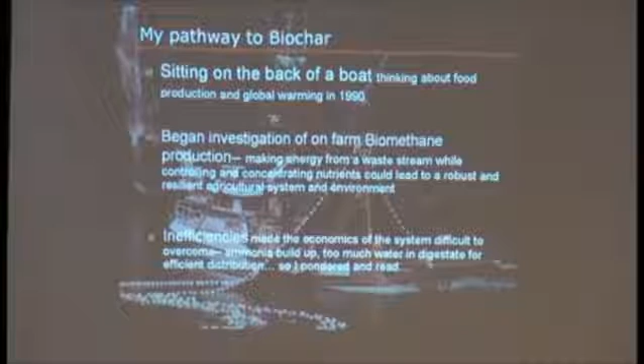My own personal background in this is I grew up around agricultural systems. My father and his family, as a boy, came over from the Netherlands, Dutch dairy farmers. My grandfather was indentured to my uncle. He moved out to Marysville, Washington, and became a dairy hand and a millwright at the Weyerhaeuser Mill in Everett.

So I was kind of around these systems. On the other side was commercial fishing.

I was around agricultural systems growing up, and I was up in Alaska about 23 years ago in Southeast. I starkly remember a set we made, and in it were 2 big sunfish and a school of mackerel. I had just read The Ends of the Earth by Isaac Asimov, and I quickly accepted the fact that we were affecting the climate.

In The Ends of the Earth, Isaac Asimov talks about the polar regions, we're going to see those effects sooner. So I sat down and started thinking about food systems, primarily because I knew that for every molecule of anhydrous ammonia we made as our source of nitrogen for conventional agriculture, we made one molecule of CO2. I also knew our tillage practices were fluxing CO2 out of the soils and into the atmosphere.

I also watched agricultural systems change. The 50 head and 50 acre kind of model had now changed to 500 or 1,000 head on 50 acres. And the system was out of whack. So I started delving into this.

I started reading Buckminster Fuller, E.F. Schumacher, and the idea that we had gained this knowledge that we have. I didn't want to regret the knowledge base that we had, but it's based on fossilized energy that we're harvesting from the ground, and shouldn't we maybe use that knowledge to fix the system?

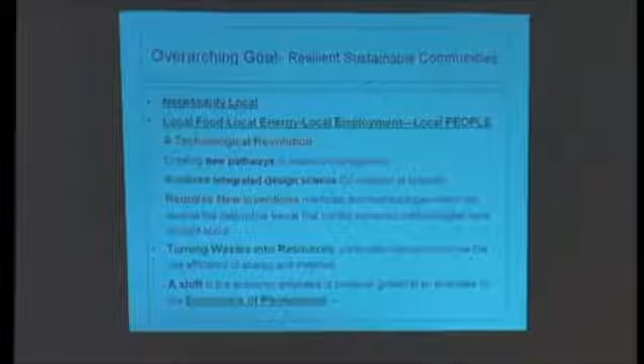And that it was necessarily going to be local. We had to get away from these huge power consumption systems, the food system that was based on massive transportation, that what we needed was design. We didn't need to really reinvent wheels, but what we needed was an integrated design.

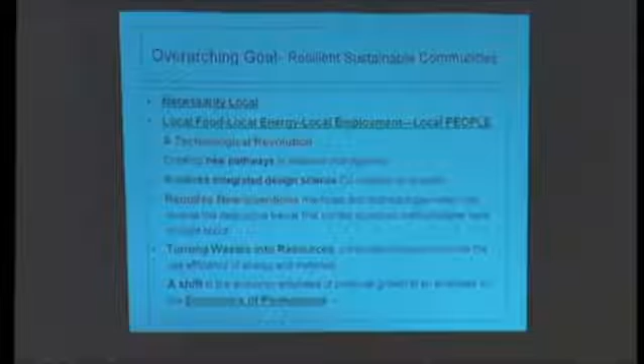These things weren't standalone systems any longer, and they shouldn't be. Maybe the cooling tower, that heat could be used for something else. So this was going to require innovation, but it wasn't necessarily going to require invention, it was going to require high design, was the thought.

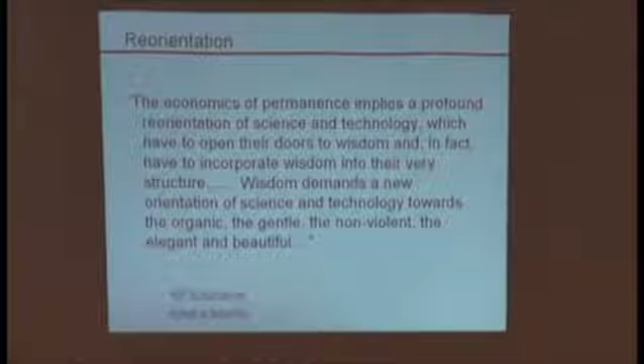The other thing is a new economic model. I really enjoy E.F. Schumacher and the idea that the CEO needing to make 320 times what the janitor makes is a lot of the reason we're in the situation we're in. It can be driven by capitalism, but it doesn't need to be driven by laissez-faire capitalism. It doesn't need to be that type of a system.

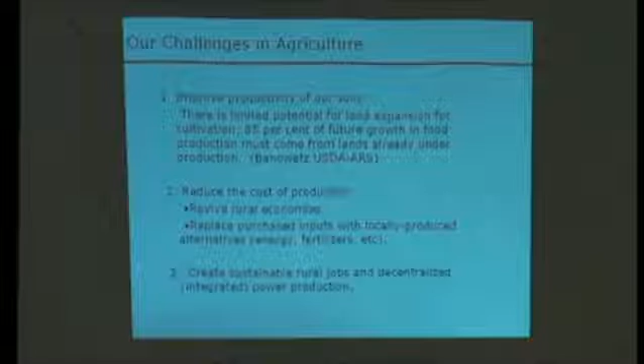Looking back at agricultural systems, we have a finite amount of soil that's going to be tillable and available for arable food production. We have to make this good nutrient-dense food, hopefully. The things we're eating right now are food-like products. The nutrient quality of our foods is just diminishing, and it's because of the way we treat the soils, we pump NPK in there, and we don't think about the whole entire system.

We really should try to revive our rural economies by localizing.

What is biochar? Biochar is essentially charcoal, but you've got control over it. You're manipulating the temperatures, and for me, I try to have a lot of control because I'm trying to research the material. But essentially it's charcoal, it's an open structure. It holds on to nutrients and it holds on to water.

And if we're looking at ag systems, if we look at cleaning up toxins, I have an ability to maybe grab onto heavy metals and grab onto hydrocarbons with it, because of this open structure.

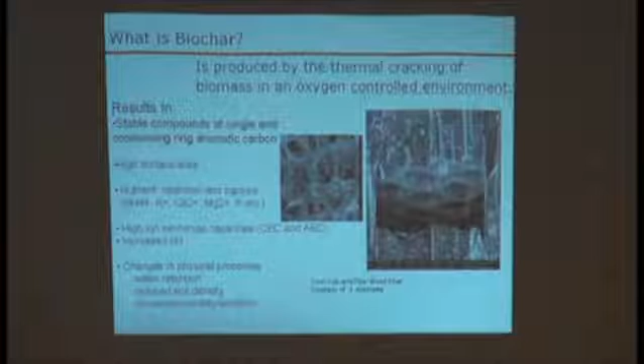I'll get into kind of what happens in this one. So if you can imagine biomass going into this system, it's oxygen controlled, it's substoichiometric, there's not enough oxygen for complete combustion.

So what happens in the process of biomass combustion, it breaks down in order of cellulose, hemicellulose, and then the lignin. The cellulose and hemicellulose tear out as gases out of the cell wall. The lignin and the inherent structure of the plant is left behind, and what you end up with is this beautiful matrix of internal galleries.

That allows for nutrient exchange, allows for water holding capacity. There's certain chemistries that get developed depending upon temperature regime and feedstock, and as a scientist I'm constantly manipulating things based on those factors. I increase surface areas, I do things like bulk soil amelioration of the soil. So on a clay soil, I can increase gas exchange and decrease the amount of water that's in it.

But on a sandy soil, I can increase the amount of water being held and maybe increase some of the nutrient cycling. For a clay, you get the platelets laying up, the char gets in there, and those platelets stack around it. So now the inherent nutrient value of a clay is quite high. The problem is it's not available because of the structure of the soil.

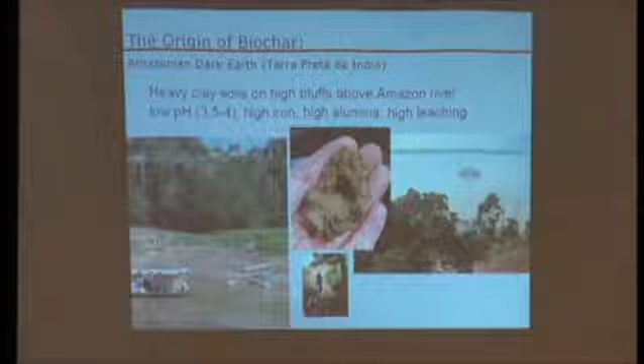This kind of science actually comes from soil science. It started about in 1962. There was a soil scientist named William Sombroek who came from the Netherlands. He heard about this very fertile soil in the Amazon. The name of the soil they were hearing about was called Terra Preta de Indio. It means the black earth of the Indians.

What we know about soils is that the jungle soils of the Amazon should be very infertile. These are oxisol clays. So Sombroek went down there, and what he found was, in fact, this black soil.

Around that black soil, in this oval shape, around the outside was a terra mulata, which is a little more fertile than the parent soil. The parent soil is an iron-rich, acidic clay, very poor for growing agricultural purposes. The terra mulata is less acidic, more nutrients, and then you get to the terra preta. It's perhaps the most fertile soil in the world.

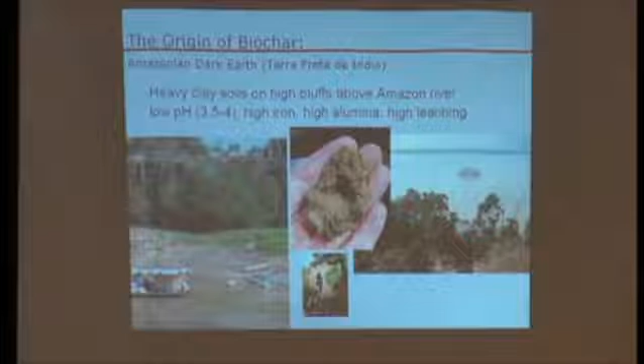As he dug down through and made his pits, what he found in there was that it was clearly anthropogenic. It had shards of clay in it. There were bones in there. There was refuse from human activity.

And so as he looked out and started looking in the greater area, what he saw was causeways that linked these things together. This was a very large civilization, maybe in the order of millions of people living in the jungles.

So whether by happenstance or by design, what the people found - this was Stone Age, 10, 12,000 years ago - is they cleared out their area where they could live. It wasn't a slash and burn agriculture, it was more of a slash and char type of agriculture. They'd go out into the surrounding jungle, bring the biomass into their villages, burn their wastes in that, and what they found was a very fertile soil.

Whether they did that on purpose or just found it later, it doesn't really matter. It's a fact. So this is the result. These pictures were taken by a friend of mine named Christoph Steiner, who had gone down there, and this was the same area right next to each other, the parent soil and the terra preta soil. They still go out there and harvest that and bring it into the local towns, for raised beds and that kind of stuff.

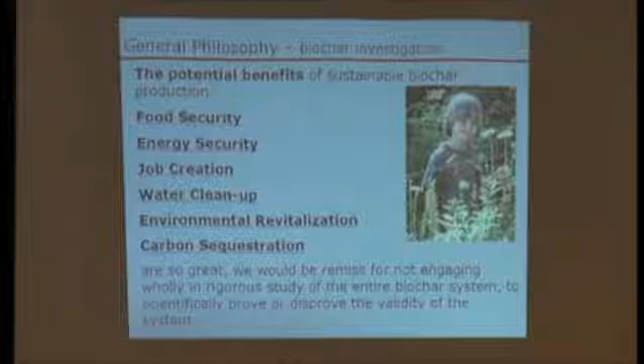So what is this, and what's the potential? It actually has potential for all of these things: food security, energy security. This is base load energy - it's biomass energy. I can use it when the sun's not shining, when the wind's not blowing. I can create jobs maybe through this process. I can certainly clean up water - I've been doing a lot of that. I can clean up toxic soils - I've been doing that. And I'll explain how this is actually a method for extracting carbon from the atmospheric cycle through photosynthesis.

Now, there is a tendency around biochar, what I call drinking the Kool-Aid. There's people that see it and think, oh my God, I'm going to save the world with this. It's part of a wedge. But it does have all these possibilities, so clearly we should investigate it.

That's why when I was studying methane gas production, I came across this and thought it might be a way to make that more efficient. I locked in on it because if I understand that carbon and make it the central core of a design, all these other things can play off of it. It's part of an entire system.

Major production techniques: you have slow pyrolysis, maybe a more traditional method, like the old Missouri kiln. There are modern methods that are a lot cleaner. I personally use slow pyrolysis and gasification. Fast pyrolysis is a modern method where you use very fine material and heat it rapidly, making quite a bit of bio oil and a little bit of char.

Gasification has been done for a couple hundred years. In that method, you take the biomass, use some oxygen, and you can actually make a gas that you can burn in an internal combustion motor. I also do gasification.

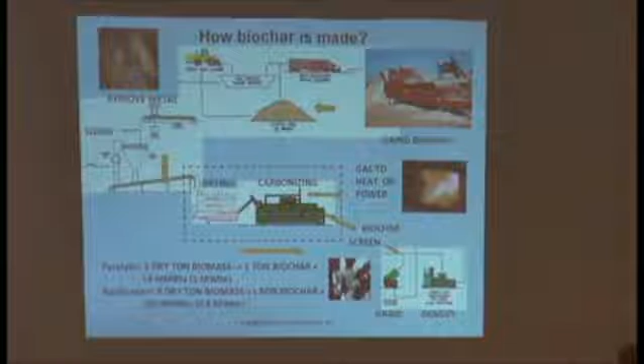So how is it made? Basically you have the biomass waste that comes in. It can go through sizing and screening, then drying, carbonization. There are fugitive losses in the real world, but if you look at the mass balance on the pyrolytic side: 3 tons going into the system, you end up with 1 megawatt of thermal drive extra, a ton of carbon, and the inherent energy that drives the system.

It's an exothermic reaction. On the gasification side, if you have 8 tons going into the gasifier, you end up with 1 ton of char and 6.3 megawatts of thermal drive.

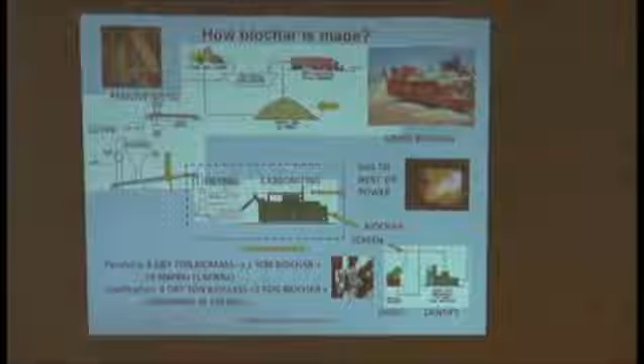It's being made right now. It comes from gasifiers. We've been doing gasification, and it's happening right now on industrial scales in various areas.

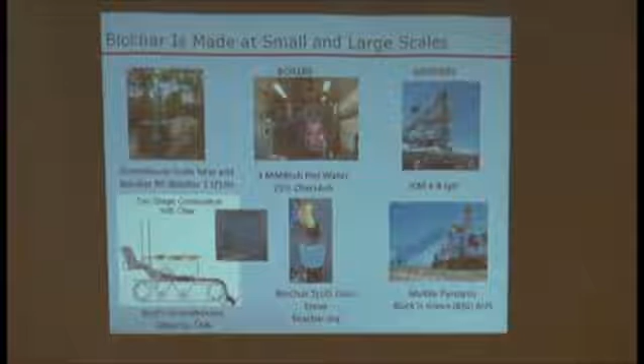We can use all kinds of different scales of size. So you have the industrial size, you have more of a mobile unit, and then you have these TLUD cookstoves, which are fantastic devices for the developing countries and the developing world.

Right now in the developing world, 500 million 3-stone open fires every day, feeding 3 billion people every day. Those 3-stone fires result in emphysema in women and children, millions of them. The number one killer in the developing country, among women and children, is emphysema from the 3-stone fire.

Also, the fuel for 3-stone fires generally comes from primary forests. And the other thing that happens is women and children have to go out and harvest that fuel, and terrible things happen to them in that process.

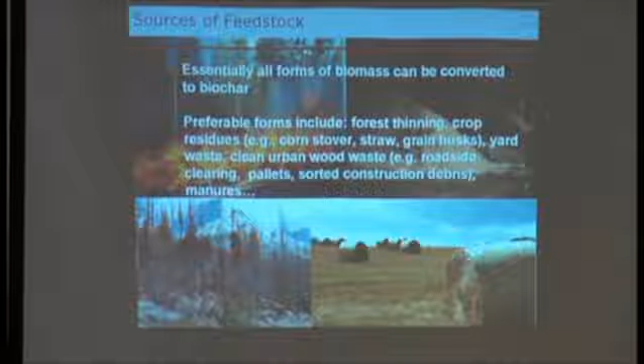Where does this feedstock come from? The feedstock is waste material, and it needs to be waste material. We can't harvest primary forests for this. It doesn't make any sense on many levels, economic or environmental.

It does have potential for being manipulated and destroyed by big money, because you do have potential for biofuels. So personally, we want this to be sustainable. The first thing I started doing is putting together sustainability practices for the entire biochar world, because we want to be self-policing, and we do not want to do what the rest of the world is doing around biofuels. We want to be very cognizant of what we do.

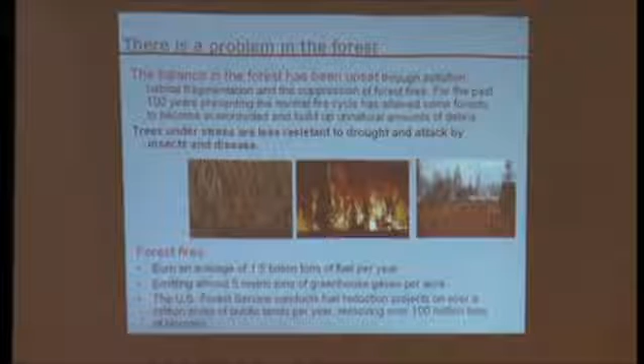I come from the forestry sector, that's where I work. We have huge problems in the Oregon forests. I know we have the same problems around here, maybe a little less, but I don't think so. Our fuel load has gone through the roof.

We've been putting out fires, and the reality is, when you look at the big picture—I'll get a little esoteric—the Aristotelian idea of the 4 elements, earth, water, air, and fire, is imperative. That's a reality that exists all around us. We eliminated fire, and fire is the unifier of all 3 of those things; it affects all 3. We eliminated that from the environment by trying to put it out, and now we have these crown fires that burn the entire forest, instead of the low, cool-burning fires that traditionally took care of the forest's diseases and these types of things.

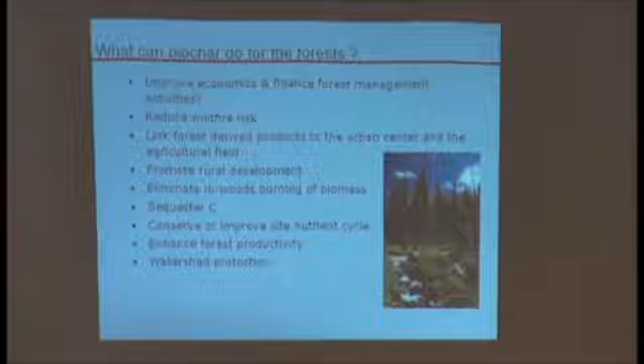So what it can do for the forest is maybe we can do this in the woods. As much as I enjoy a good bonfire, I see it as a tremendous waste. When I go out there and light them off in the forest, yeah, it's cool, but I'd much rather turn this into something useful.

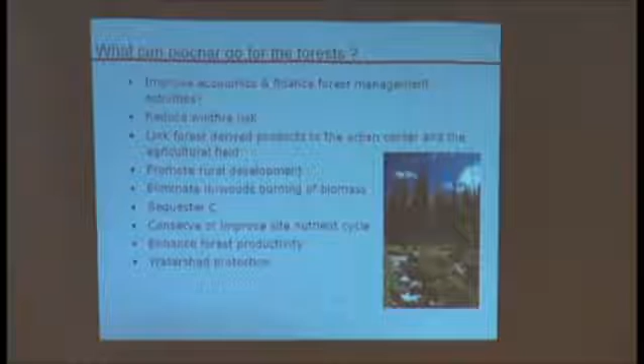So how is this a carbon reductive methodology? We all know fossil fuels are going to put carbon in the atmosphere. These were taken off the cycle millions of years ago. It's no longer on the balance sheet of the Earth, and then we shove it up there and it's throwing it off.

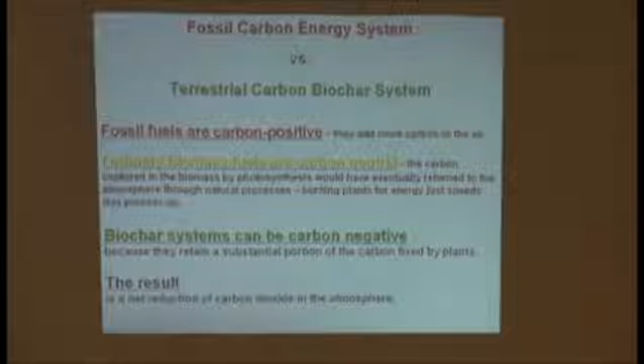Normal biomass, if we burn it all the way to ash, is a net zero sum gain. Now biochar, when I put it into the system, if I'm harvesting my material properly, getting it from a waste material, it's going to be fluxing back into the atmosphere. It has a life cycle of around a decade in the Northwest. I take it through this process, harvest this energy, and yield carbon, and that carbon has a half-life in the order of 500 to 1,000 years.

And that carbon, then I use it for something. I find value in that for society—either nutrient exchange or cleaning up toxins is what I've been doing, and water holding capacity.

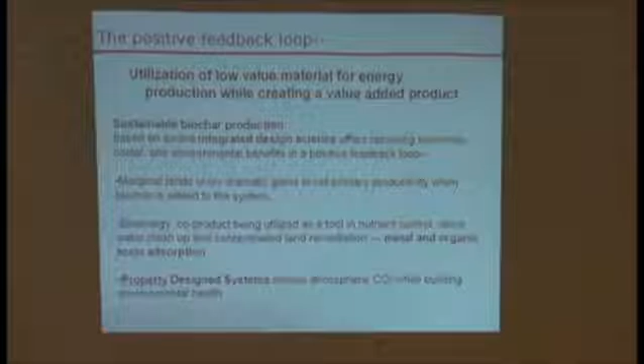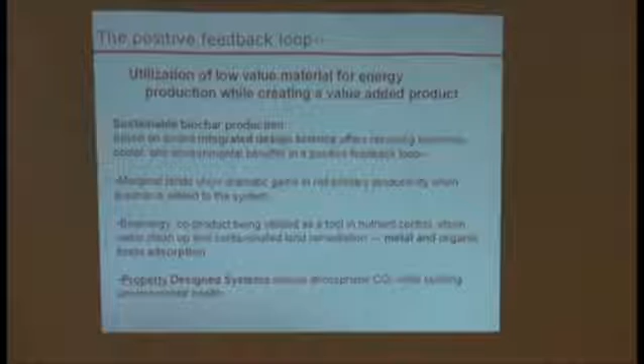Now, if I take this material and apply it in an area—let's look at the developing world—these are generally very poor soils. If I take this carbon and add it to a very poor soil, I can show many papers that show net primary productivity increasing 150, 200%. I'm not going to see that increase in a mollisol of the Midwest, but I'm certainly going to see it in a developing country with very poor soils, like Haiti or the Congo.

So now what I can do is maybe these folks can gather these little stoves, cook their food on grasses, take that char and put it into their poor soil, and increase that net primary productivity around their village a little bit. Do that again, continue that cycle, and all of a sudden they have a fertile soil. Now they don't have to do slash and burn agriculture anymore, and they don't necessarily have to go out far distances to collect their fuels.

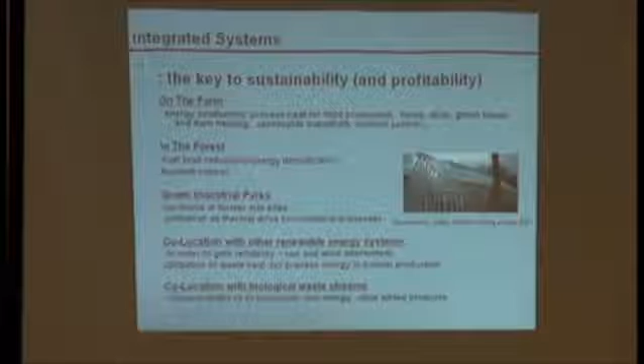For us, I can't stress enough how this is part of a whole system. This is integration—this is what we need to do. This is what I'm driving toward: building these systems so that we integrate them together, so that things like methane gas production from bio-waste, from food waste, and from dairy operations are linked together with composting operations, which are linked together with biochar production. Because all these things can play off each other and the co-products can benefit one another.

The co-product of the carbon that's produced—I take the nutrient-rich liquor that comes off the biogas plant and mix that carbon with it. I grab the nutrients out, I clean the water. I take the fiber-rich fraction that also comes off that plant, and I co-compost.

Now I hold on to these organic acids that develop in there, which have food value for microbes. Those impregnate that internal matrix of that carbon, and then the microbes start to go in there as a food source—they find a food source and can grow into it. The other thing that starts to show up is more and more hyphae, mycorrhizal fungi. You start to build the food web of the soil again, and you start to get nutrient-dense food again.

So as a researcher, I needed to be very specific. This needs to be a commodity if we're going to do enough work. We need to take gigatons of this stuff out of the atmosphere. We're at 400 parts per million right now. We need to take it down to 350. So this has to be driven.

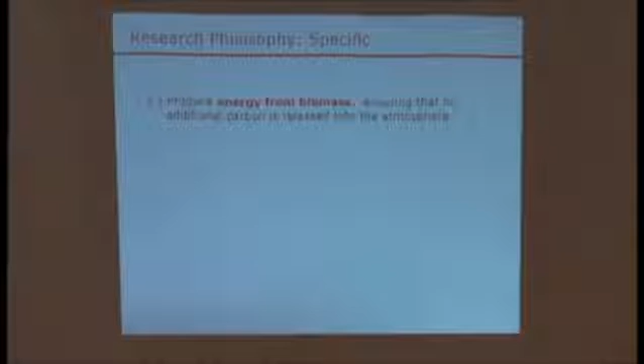Yes, we want the villagers to do it too, but us in the developed countries, we need to do this on a pretty massive scale. So it's got to be part of an economic model where this is a co-product from energy production. We have to do a very high, rigorous design so that it's done and it removes CO2 in the process because of my location.

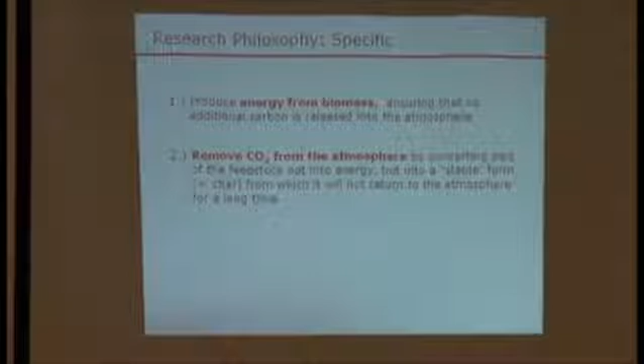I located at a timber yard because I knew all that biomass was coming in there. It's already there, I just move it over and carbonize it. So now I make it in a stabilized form. And at the same time, it's a very dynamic material. The pHs can be adjusted, the chemistries within it can be adjusted. I want to do this in an artful manner, put it in its right place so I can get its best use. So I can make...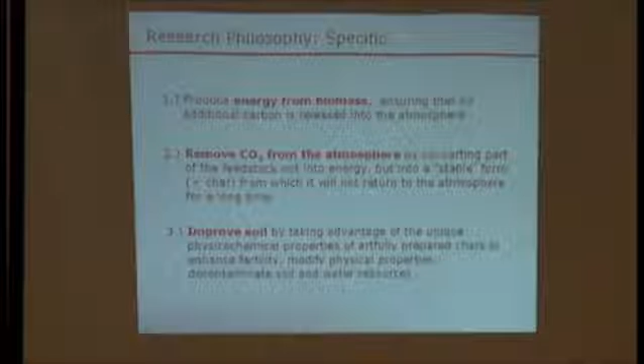a very alkaline material for a very acid soil, like you guys probably have around here because of all your rainfall. So it can be a liming agent. If I want to put it into a compost regime where I want the pH to maintain at about 6, I can do a lower temperature char. I can hold the pH at about 6, and I can hold onto the ammonia as ammonia. I don't lose it as NOx into the atmosphere.

NOx is, I think, 320 times worse than CO2 on a life cycle analysis basis. And now I have a compost that I haven't lost the nitrogen out of, and it's still plant available.

So this is just a description of how dynamic the material is. We made chars across temperature regimes of wood and grass, and... yeah, I don't need to look at that. So anyways...

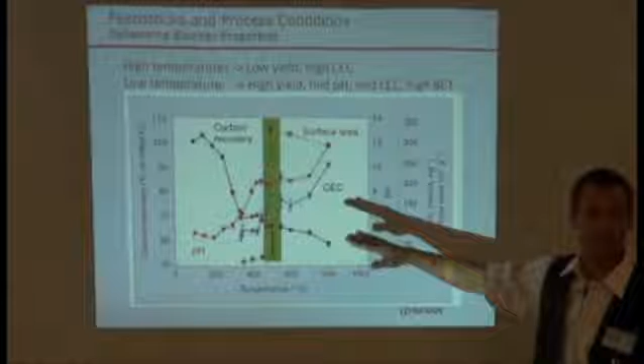This is a description done by Johannes Lehmann from Cornell, describing what happens across a temperature regime. We hit in this area, and all of a sudden a bunch of things start happening. We do see the carbon recovery gets lost, but that carbon would get lost anyways from rotting or whatever. However, we hold onto about 20 to 30% of it in a form that's stable.

Let's see, what surface area goes up, because of all that. See, surface area goes up. Cation exchange goes up, not always, but it can. And...

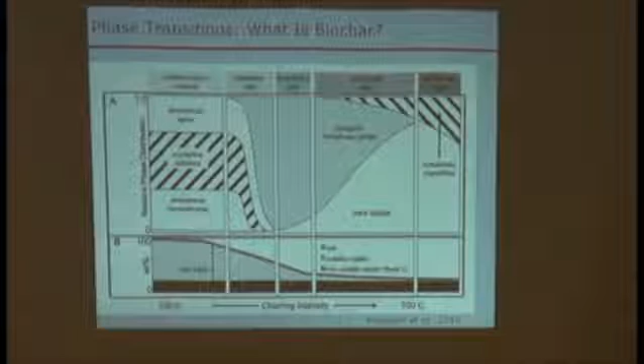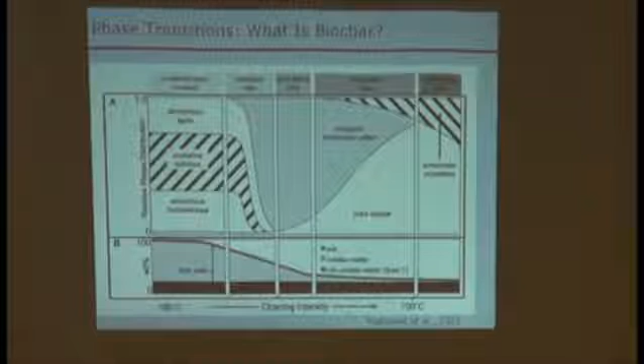the pH goes up. So what this model, done by Markus Keiluweit down at Oregon State University, describes is what portion of it becomes a stabilized form, this turbostratic crystalline carbon. This is the potential that you can hold onto the carbon. Basically it's a description that we can hold onto about 25 to 30% of it in this form that has long half-lives. Why is that?

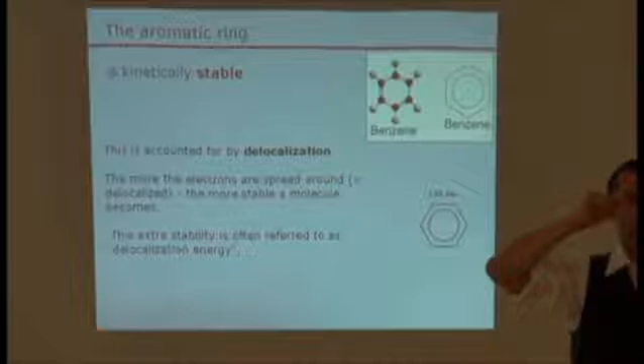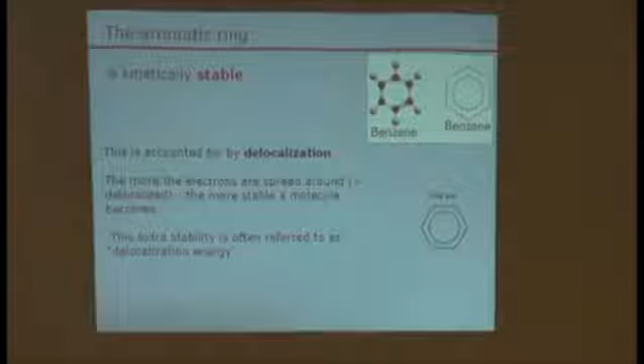When you look at biomass that's gone through quite a bit of temperature, at the end of it what you end up with is this carbon ring. As that hydrogen finally gets driven off, you have 4 valence shells that the carbons need to fill, so they just swing around and grab another carbon. So now what happens is at that temperature regime, you build a lattice work of double carbon - not quite a double carbon bond, but close enough. It builds in height and width, and you end up with this very stable material that doesn't behoove the wee beasties to crack and try to get the energy out of, because it costs them more. That's why we end up with this long-term ability of it to stay in the soil.

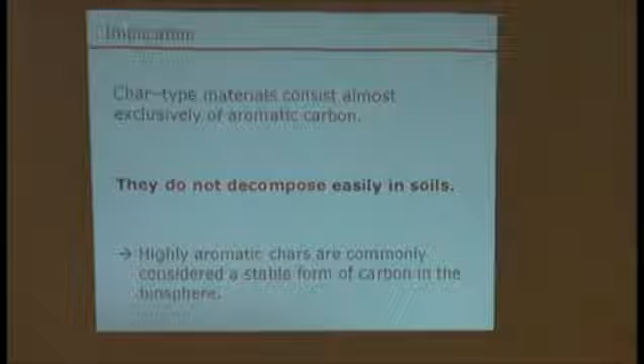So it doesn't decompose easily, but the edge structures do break down. And the other thing is, if we have minerals involved in this, minerals get in the way and they become exchange sites. So while it doesn't break down, it does slowly oxidize.

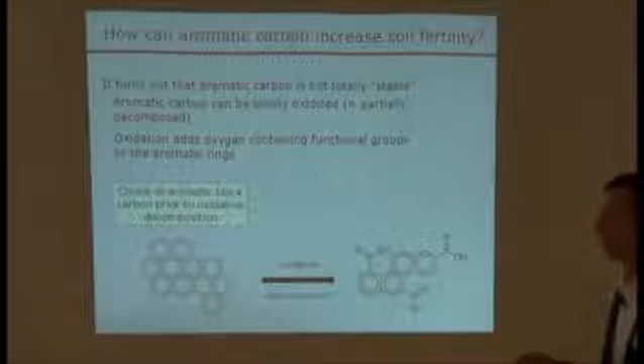After it's sitting in the soil, or if I manipulate it with steam, or if I use ozone or something like that when I'm screwing around with it, I can get these oxygen functional groups to show up. Now I can start to do things like grab up heavy metals, exchange nutrients, and hold onto them so they're not lost by getting washed out. And the plants can harvest them using the hyphae of the root. I hold onto all of these minerals. This is just a description that I'm also holding onto organic toxins and inorganic toxins in this process.

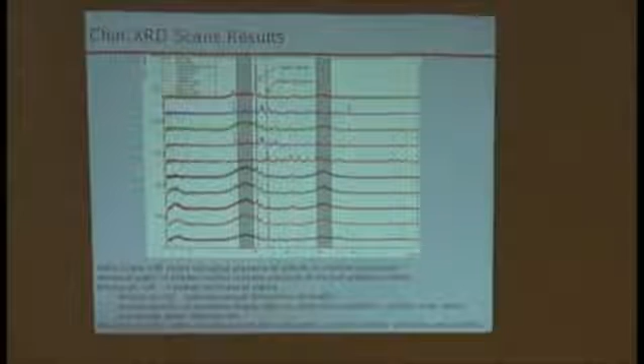So what this is, I was outperforming activated carbon sometimes for cleaning up toxins, and I couldn't quite figure out what was going on. So I had a professor buddy of mine do some XRD scans, and what we ended up seeing was carbonates, silicates and sulfur functional groups. That was why I was outperforming activated carbon - because I had these minerals involved in there.

The zinc comes along, I bind it up with a carbonate or a silicate. It's a dynamic material - some of those things are amphoteric, so they'll switch charges depending upon the pH of the solution. The silicate is always going to be negative, however, so I can do both cation exchange and anion exchange on the same material. It's very, very unique in the environment.

So this is just a description of some of the things we saw. Some of the acid groups that are left in there also bind up toxins, right? These acid groups show up through the temperature. I don't know, I'm kind of going off a little bit.

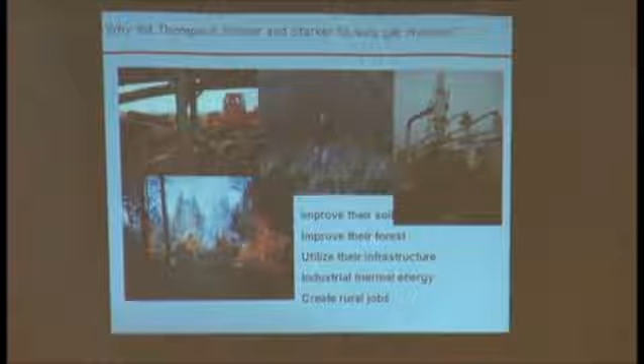Let's see, so why would a timber company get interested, right? Well, I worked for Thompson Timber and Starker Forests for about 4 years as their director of biomass energy, and basically what that allowed me to do was just do my research. I didn't have to go chase grants.

And they're a unique family forest company - both of them have been down there 100 years one, 150 years the other. They have concern about their rural environment, which I imagine exists in this community too. We're concerned about what's going on in the forests, we're concerned about how we're affecting the waters, and we wanted to reutilize old infrastructure.

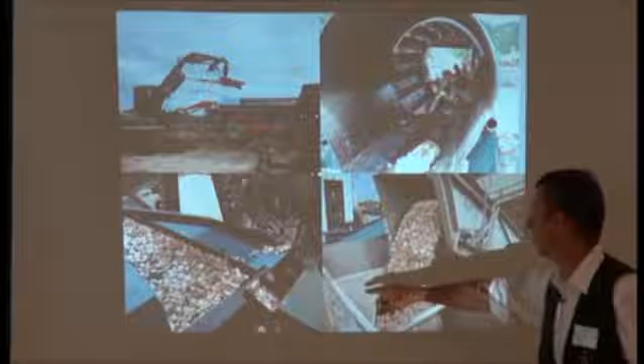This is kind of a typical timber yard. You can just see how much biomass is laying around there rotting. So this is a chipper plant that we have down there. These chips that come off the top screen, that's what I use for my gasifier.

I'll describe what my system is. That is my most refined fuel, right? It's just the overs off our chipper plant. That's kind of what they look like where my hand is. And then this is just more of that rotting material.

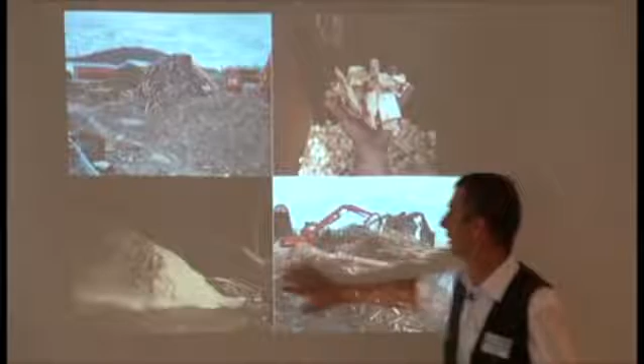This is what I use for gasification. This type of material here, it can have rocks, whatever, minerals - any size doesn't matter as far as density of it. That I can pyrolyze, which is a separate system, right?

So now I can take this more refined fuel and actually run an internal combustion motor with it. On the pyrolytic side, I can take the waste - like you imagine the chipper trucks coming around here cleaning up - that stuff can be pyrolyzed, and it's very good for cleaning up toxins because of the amount of minerals involved. There's not a lot of minerals here, but I can make good clean gas there.

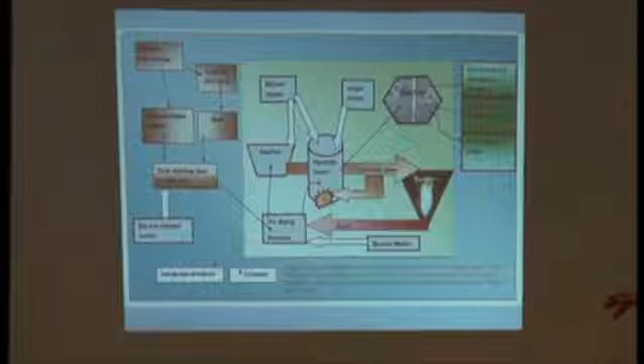So now I can make chars anywhere from about 300 degrees centigrade to about 700 degrees centigrade. I have thermocouples all over it so I can monitor it. Now I can make about 100 pounds an hour of this material - I can take that out and make enough so we can do research. That was the point. And I need to have provenance behind the material so that any results I saw, I could correlate back to something and make a statement of why this happened.

So we went and sourced a Pacific class gasifier. This was built about 25 years ago - this technology has been around a long time. This happens to be one of the best designs that was ever built. It's called Pacific class because it was built for the plateau of Papua New Guinea.

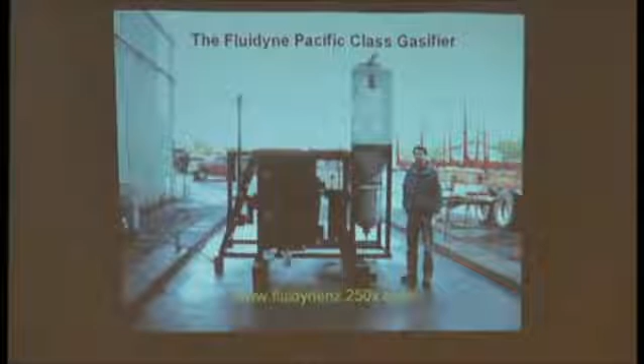Two of those gasifiers ended up at a doomsday cult over in Montana. Y2K failed to go off quite right, so they all sued each other. This ended up getting bought and taken down to a nursery down in Northern California. When I got involved in this process, I called up my buddy Tom Miles, an engineer over in Portland, Oregon, and said, Tom, I want to run this retort, but I want to use a gasifier to do it - where can I get a gasifier? He helped me get this down in Northern California.

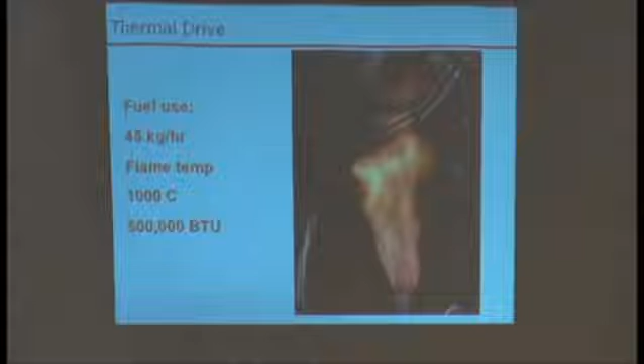The thermal drive from that is I consume 45 kilograms an hour, about 100 pounds an hour. The flame temperature fluctuates from about 1,000 degrees centigrade to about 1,200 degrees centigrade, and puts out about 500,000 BTU.

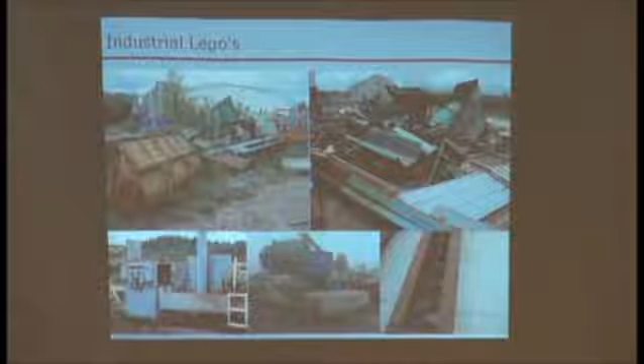Then I went about building a machine. We tried to source one, but I looked around the old paper mill, and I'm pretty good with the cutting torch. It went into that pile and I scratched my head for about a month, found an old fuel tank, cut it in half, and found some refractory brick behind my buddy's ex-wife's house.

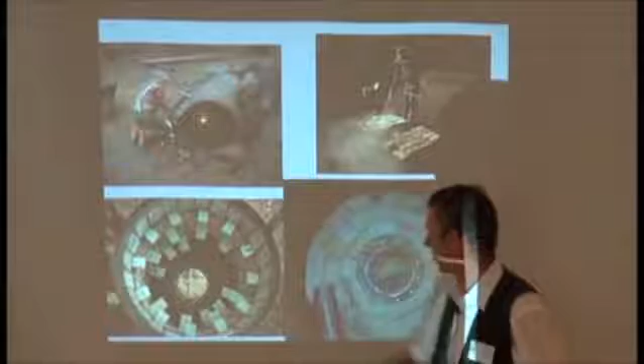The reason these candles are sticking out is because that flame comes in as a tangent, and those candles cause the flame to tumble. So now I end up with that heat, which helps the heat get into the refractory. That converts the temperature coming out, or the wave, from a high frequency wave to a long penetrating wave.

Now the refractory heats up, and I have an interior tank that I built from an air tank. Then we made a cone on a press brake, and I ran an auger up through the middle of it that we drive with an old street sweeper motor.

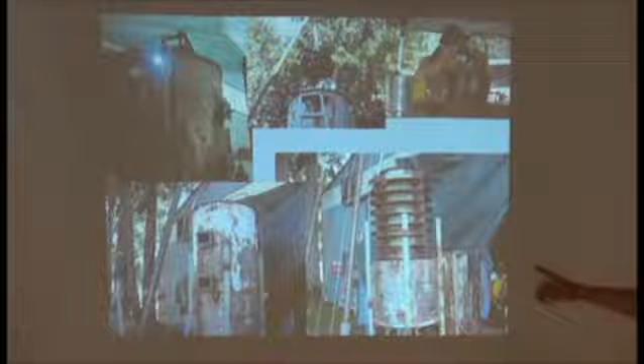Put these things on the outside so the combusted gases have a tortuous path to get out. The furnace tries to go to about 1,200 degrees centigrade, but that's pretty torturous on my metal, so I try to keep it under 900, and then the exhaust gases come out of there.

That's just the burner. You can't really use a suction device to get those gases out, so I use pressurized air coming out in that burner, and that creates a low pressure area that sucks the gases out and draws the combustion air into the combustible gas.

And then it gets up to temperature. Those gases come out from the top, back into the hearth and around the outside, and then it starts to drive itself. So I get it up with the gasifier.

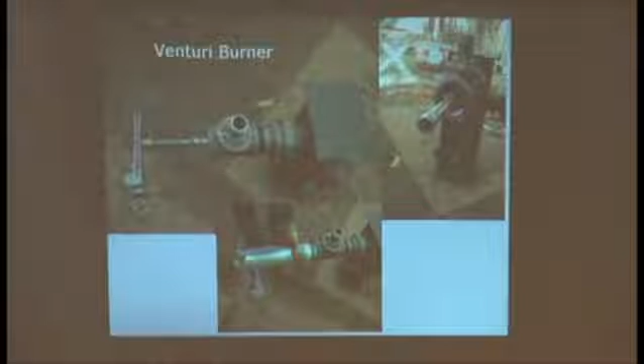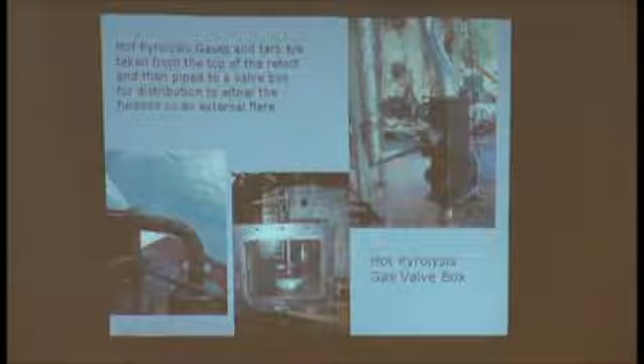That's just more pictures, I mean, these things can be simple. This is an old extension off of a trailer that got bent. I cut it off, found some old C-clamps out in the shop, cut those off and put a plate on. I'm valving gases with this that are around 400 degrees centigrade. Cost about $20 in material. It'd be $5,000 for a valve like that, stainless steel, easy, maybe $15,000.

That's operated for about 4 or 5 years. The infeed hopper on the top, I got an old knife valve. I load it in charges, it's kind of semi-continuous. I drop these charges in about every 15 minutes.

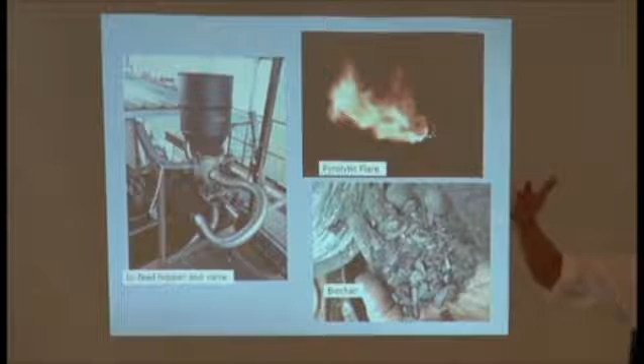The exhaust gases come up over top of that valve. They're anoxic, rich in CO2, and under pressure. That keeps the oxygen out, so I don't have any issues with explosions. So that opens up, biomass drops in, and then I close it.

When I'm trying to make a low temperature char, I'll flare to the side. This flame here is about 6 feet long and probably about that high, just pouring out of the side. That's when I'm trying to control the temperature for a lower temperature.

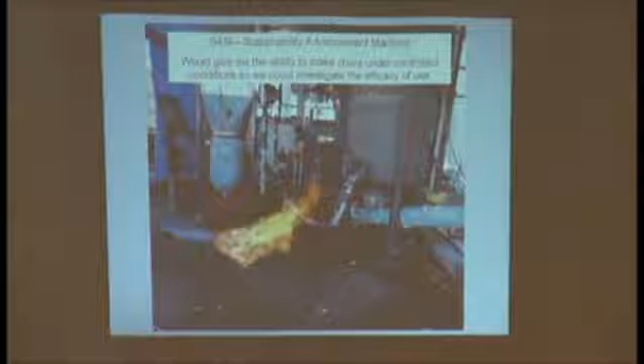So that's the machine, that's me flaring the gases to the side. It's about 14 feet tall on the retort side. This is the gasifier here, and this is the retort, and they're just linked. I take the producer gas and valve it over here, so it drives my pyrolytic retort.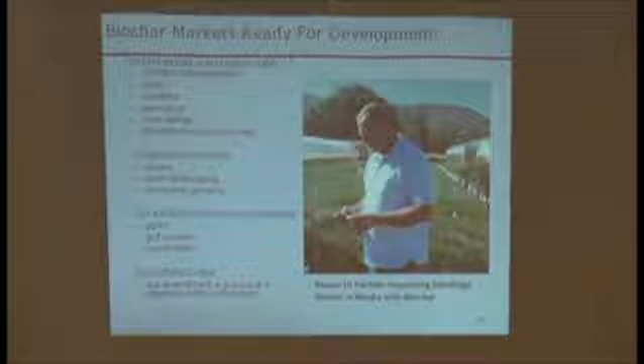So I came into this from nutrient cycling, but the price points for a farmer are a little too high right now. We need to get this up to industrial scale, so I started looking at remediation. That's where I've really been doing most of my work the last 2 years in the field, cleaning up toxins from stormwater, polycyclic aromatic hydrocarbons, all kinds of hydrocarbons.

This stuff works really well. When that oil spill happened, I quickly got an aquarium, filled it up with oil, threw carbon in there, and it sucked it up. Then I took that carbon and burned it, and it made a great fuel. I sent the information to BP and they didn't really want to talk to me.

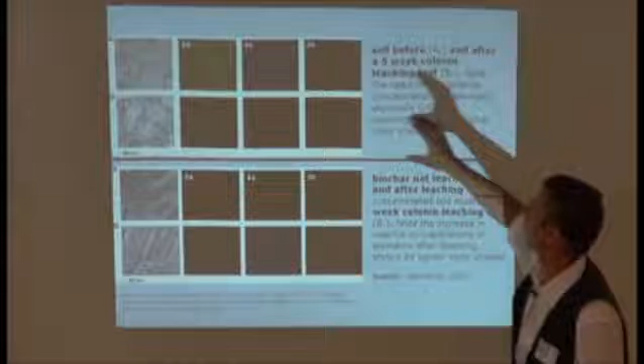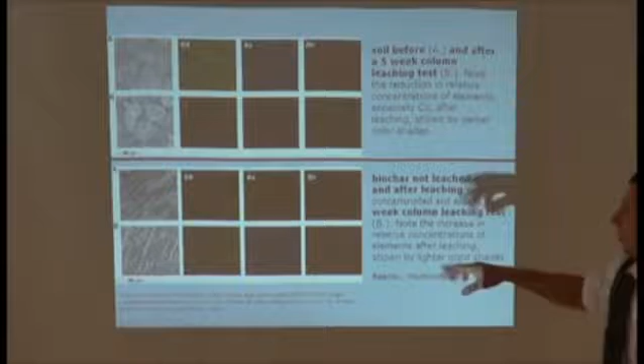We've used biochar for cleaning up mine tailings, increasing plant growth in very poor soils around mine tailings. This was done by Professor Beasley, so we can see a visual description. Basically you have a soil with metal toxins in it, without char, and down here in a lower column, a soil that had char involved in it. You leach it out, and what it shows is that the toxins get bound up.

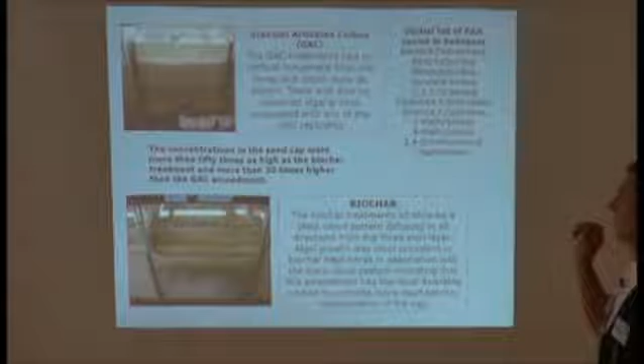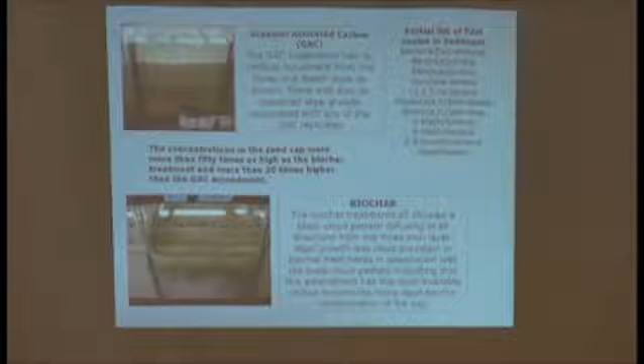This one we did. I made some chars out of manures for particular chemical reasons, at two different temperature regimes, comparing it to granular activated carbon. This was sediment from a Superfund site. You can see this algae develop and move throughout the whole sediment layer. After a couple weeks we saw the stuff move around, which indicates a lot of chemical activity, then we saw this algae bloom, and then we couldn't find the PAHs anymore — they had been consumed by the microbes. I put a lower temperature char in there because it has food value, so that increased the benthic community and gave them a place to base off of and build up their numbers. Then they moved out and started consuming those PAHs, breaking them down into CO2 and water.

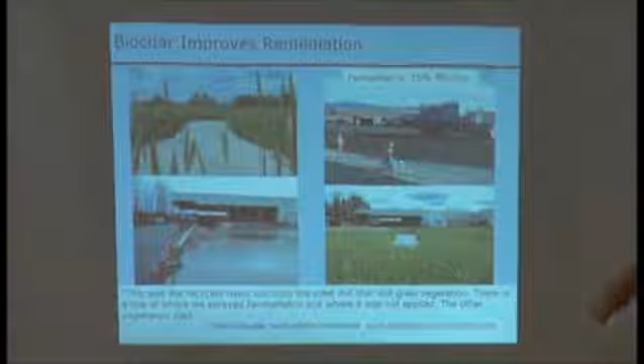So we've been doing some remediation work. I've been working with a company called Sunmark Environmental out of Portland. This was going into an old metal mill, and they were really getting nailed by DEQ for their discharge. So we went in there and put hydroseeder mixed with 10% char. This got excavated, and there's char down in here. The upshot is these guys are making benchmark now. We increased the growth of their plants around there, and it's quite successful.

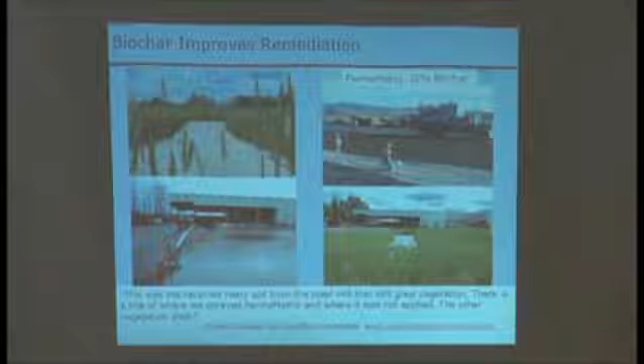Now we just went out to North Dakota, where they're doing all the drilling, two or three times a day. About 5 acres of the North Dakota prairie gets covered in a blowback that includes salt, water, and hydrocarbons. We went out there and they couldn't get anything to grow, so we sprayed this out there, and right at the beginning of winter we were actually able to get the prairie covered back in prairie grass.

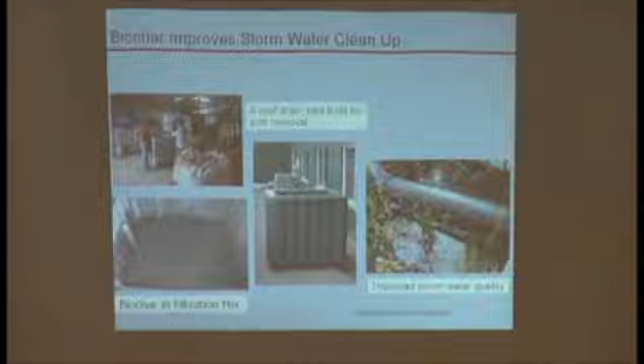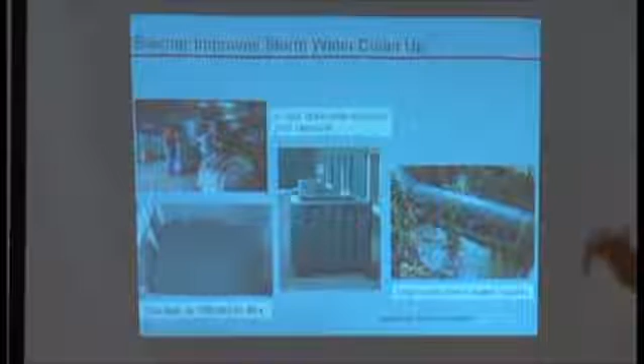Now, in stormwater, zinc in urban environments generally comes off metal roofs and off 3-tab roofs because we don't like moss. So we put zinc up there, it sits out there in the sun, and zinc oxides develop. DEQ discharge rates are about 86 micrograms per liter. When we were out testing this, we were seeing 3,700 micrograms per liter, 4,200 micrograms per liter. Zinc is very destructive to fish, and copper levels are really through the roof. So we just put a tote underneath there of biochar mixed with some shale, and we're able to get these guys down to benchmark. Now we're looking at trying to include this in the soils that go into what they call green streets.

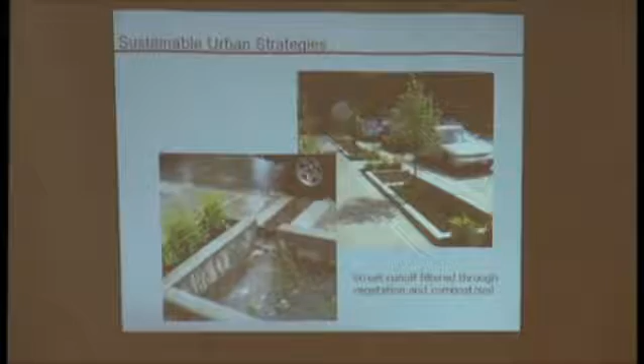So on the front end, we could go back to the composting facility and mix the char into there. We get these organic acids show up in the char — it benefits the compost regime, and it benefits the char, giving us activation sites in there. Then we put it into this environment and bind up the toxins. Just integration, design. This was 730 micrograms per liter, and we took it down to 40 — these are different chars we were analyzing. 2,700 micrograms per liter down to 193. In this case all we'd do then is add another tote, and we could get it down to benchmark.

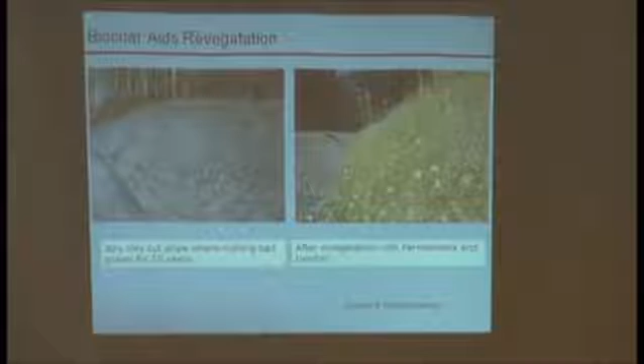So I'm happy to take questions.

How about inoculation? I've drunk the Kool-Aid and fooled around with it at home. Is there a lag time when you add it to soil? And if you're putting it in really poor soil, does it have to be inoculated with the good stuff before you do that? Really poor soil, you're going to see benefits right away, right? I would always suggest, if you're using it for agricultural purposes, to impregnate it with nutrients prior. A real simple way is compost, or soaking it in a fish emulsion, or putting it in a bucket and peeing in it, whatever you want to do.

What's your sense of performance for the common Jolly Roger TLUDs you see on the internet? Are they really producing good quality biochar? Well, when you look at good quality, it depends what for. For agriculture, certainly, it's high temperature. In the biochar, the scientists will say, oh, but it's got ash content. Ash isn't a problem, it's beneficial for ag. As scientists, we want to narrow and control it, and they don't like ash. Well, ash is fine. If you start to get too high of an ash, you might have an alkaline issue to be aware of. But if you just take that material and put it into a compost, it's going to balance things out. If it's super alkaline and you put it into the compost, you might want to monitor your pH, because if our alkalinity goes too high, we lose the nitrogen. So monitor your pH, maintain it under 7, try for 6 or a little over, and you can acidify your compost through different means. But if you put it in your compost at about 10 to 15%, you're probably not going to affect the pH anyway, but you are going to hold on to the gases and not lose them.